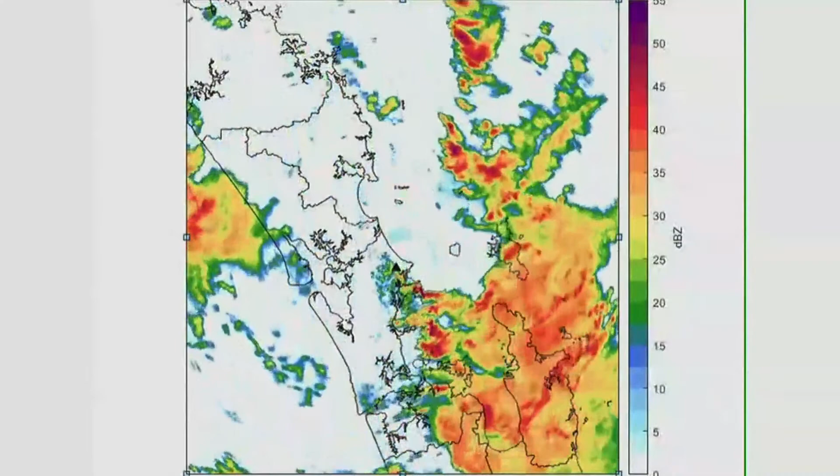We've got here what was hopefully going to be a simulation of the rain radar event. Can someone just click on that? And that's effectively the rain radar. And you see up the top, that's midday at the moment, coming through to 1 o'clock in the afternoon, 2 o'clock, 3 o'clock, 4 o'clock, 5 o'clock, 6 o'clock, 7 o'clock, 8 o'clock, 9 o'clock, through to 10, 11, midnight.

Now, what's exceptional about the event is that the intensity of the rainfall was very widespread across the region. Very unusual to have an event of that duration over that degree of geographic inclusion.

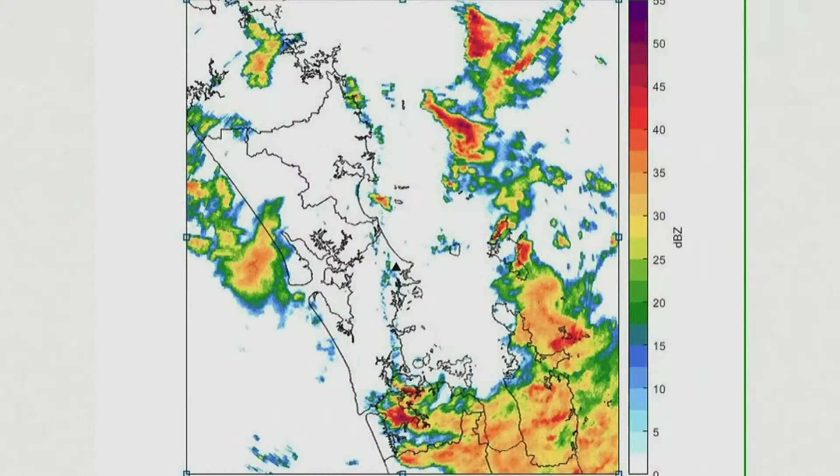What's also interesting about the 27th of January is that the forecasters didn't get this one quite right. So these are two forecasts, one from Windy, one from Metvuw. The blue line is the predicted rainfall and the yellow is the actual. And the two spikes are the 27th of January and the 1st of February.

So unlike Cyclone Gabrielle, where the forecasting was incredibly accurate, in this case the forecasting wasn't accurate, but what I can say is that even on that small blue intensity, the preparedness was for what was considered to be a normal heavy rainfall event, where there's a whole lot of preparedness work that takes place. So the preparedness work still happened for this event, not knowing what exactly we were walking ourselves into.

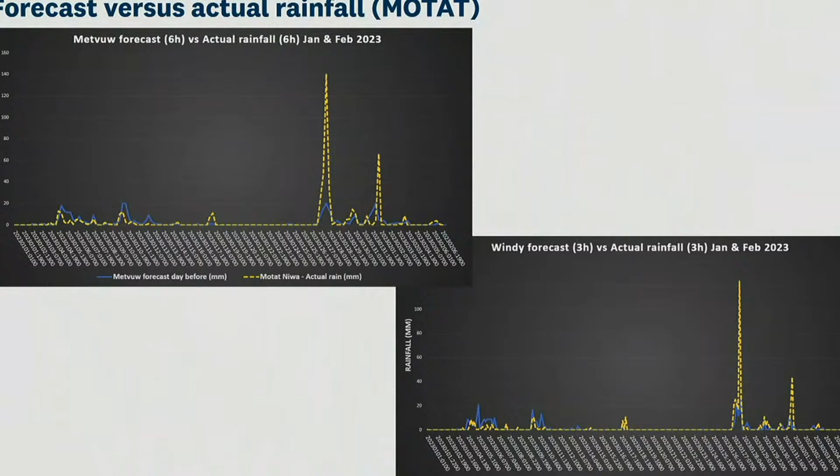So from the rain radar, this is the actual annual rainfall intensity. So the black indicates greater than a 100-year event. And inside that black area, the greater than 100-year event actually is across all durations, whether it's for 10 minutes, 30 minutes, 1 hour, 6 hours, 12 hours, 24 hours. Just about in all cases within that black area, we exceeded that event.

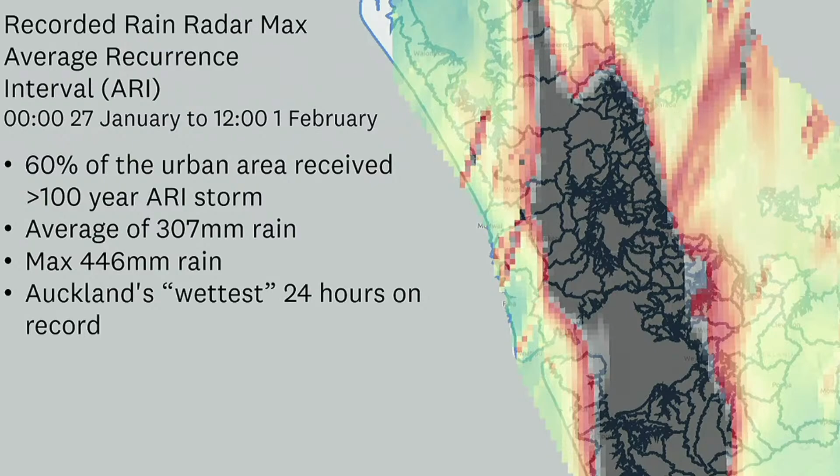In fact, you'll see there that this is actually the wettest 24 hours in the history of Auckland, and the weather records of Auckland go back to the early 1900s. And not only was it greater, it was greater by some 50% than what was previously considered to be a 100-year rainfall event. This is Cyclone Gabrielle.

And for Cyclone Gabrielle, very similar around the 100-year intensity. But of course, what's happening in Cyclone Gabrielle, if you compare to the previous slide, is it's almost the rest of Auckland that missed out on the first event that, ironically, got hit with the second event.

And in terms of Cyclone Gabrielle, we had in Piha in a 24-hour period 360 millimetres of rainfall. Say again? 360 millimetres of rainfall in Piha in a 24-hour period, which absolutely made all of our previous estimates redundant, to be quite honest, because it was so far in excess of any previous design prediction. We had gauges in Muriwai that got that.

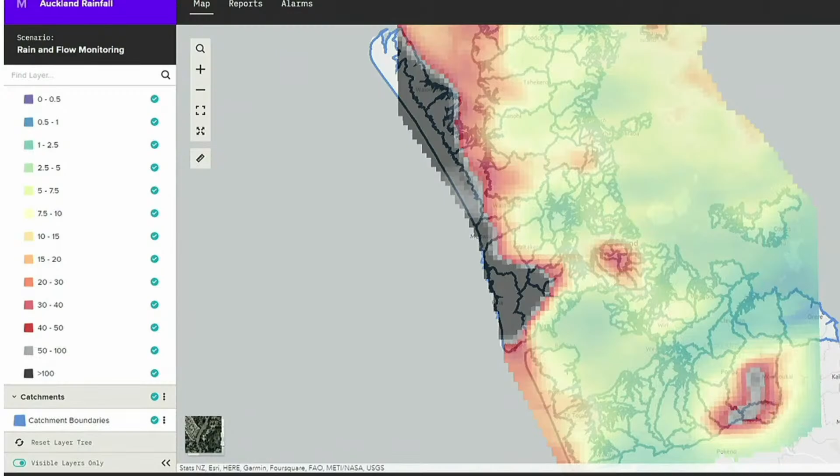And that, of course, is putting huge demands on the staff who are out there responding to these issues. The good news is that we've actually got out there and just about been able to look at every request for service that has come in. Some can be resolved immediately, but a number require a much more detailed engineering investigation. So as of the moment, we have some 970 engineering investigations that are ongoing.

So the sheer scale of the event means that we've had to do a lot of immediate upsizing, if you like, within Healthy Waters from the wider stormwater community to assist in this area. So when we look at our own staff and consultants and contractors who are currently engaged in our response, that number is over 300 full-time equivalents and increasing as I speak.

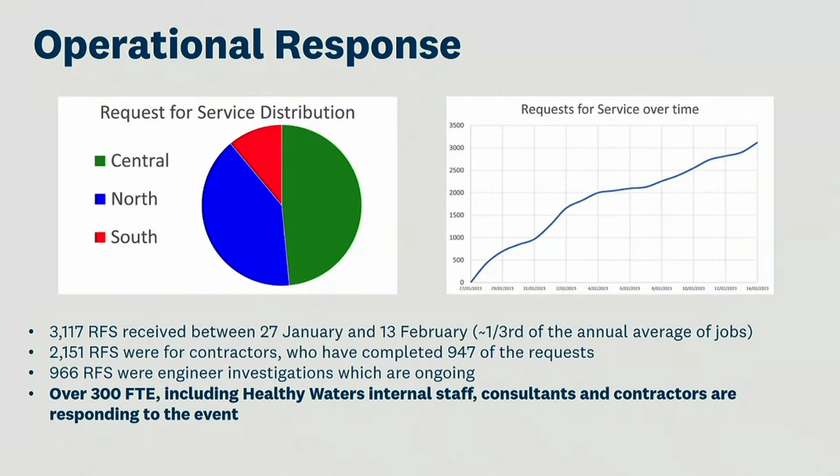Just like to highlight the fact that we do a lot of work on hotspot inspections for every event where there is bad weather forecast. So we have some 230 assets or locations that are subject to that work. And this is an example at Sunnynook, which is one of our recent stormwater projects where we've created a big embayment area to deal with big events. And so this is the cameras that are actually on the Sunnynook grill.

So you can see what it was like when the event started. And on the right-hand side, you can see where it got to at the peak of the event. But you can see how quickly on the day after, on the 28th of January, the water levels have reduced. But you can also see the good work that the grill did, because just look at the sheer volume of material that's deposited against the grill. And of course, that all happened through the event. We've got no way of knowing how that occurred because it's all hidden by the water. But that's the after effect of that grill.

And so I know at the time the community was surprised how large that grill was, but it's certainly done its job. And you can see there that the area's now, pretty much a day or two after the event, back to normal. So that's what can be achieved with good proactive stormwater design.

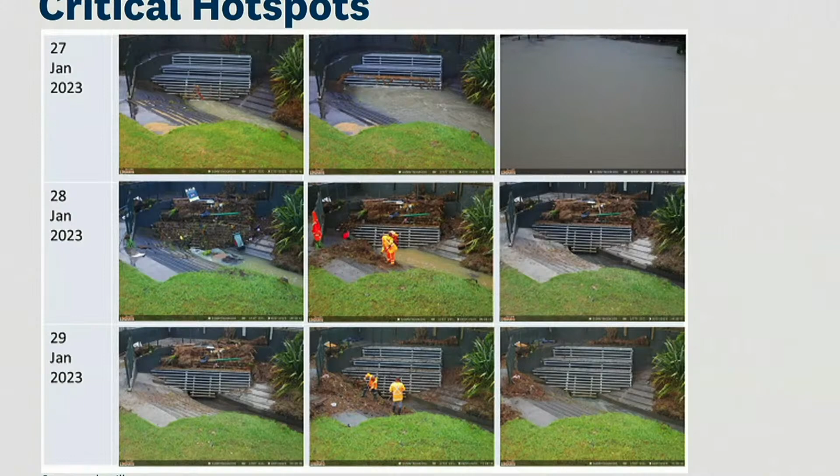And so one of the things that we've been thinking about for both catch pit cleaning and street sweeping is that, because one of the issues we've got at the moment, you go to do sweeping or clearing in a street and cars are in the way. You can't get to the catchpit because there are cars parked over the catchpits. So one of the future initiatives we want to think about is maybe having a bit like a rubbish bin collection slot where every so many months a street is dedicated for a full clearance where the sweeping and the catchpit clearing is done, and the residents would have to find alternative parking arrangements. That's the sort of thing that we probably need to do.

In Japan, they have forklift trucks that come along and lift up all the cars out of the way to do the cesspit clearing, just to show you that it's such a big issue internationally. So moving forward, we really think that the catchpit frequency, annual cleaning, is not good enough, and we need to look at the ability for more funding to increase the frequency of that cleaning.

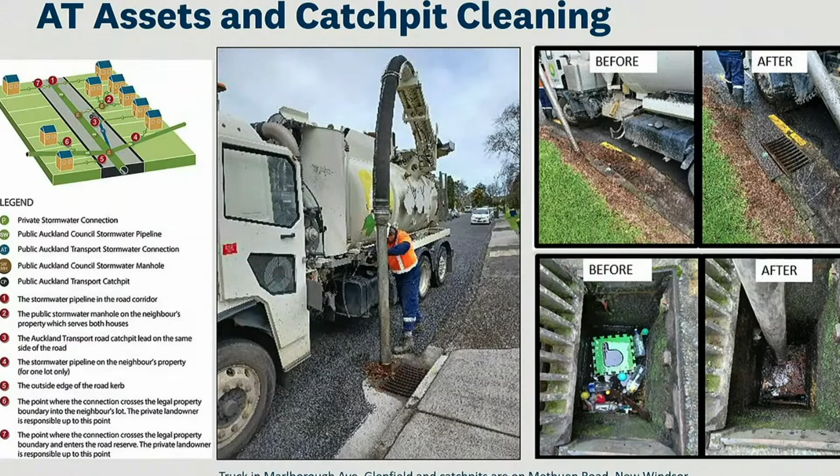Next point I'd like to make is around infrastructure and the fact that when we talk about our network, a massive part of our network is both ground soakage and natural streams. So if you take ground soakage, it's where we've got the fractured basalt, which provides a pathway for the water to get into the natural groundwaters. The problem is that those areas do not work when we get to really high intensity rainfall; those areas get absolutely saturated. So there's nowhere for the water to go.

And the water just can't be pumped down because the hydrostatic pressure from the groundwater will push to the surface faster than the pumps can remove it. So there is no pumping solution under this circumstance. You've just got to let Mother Nature take its path.

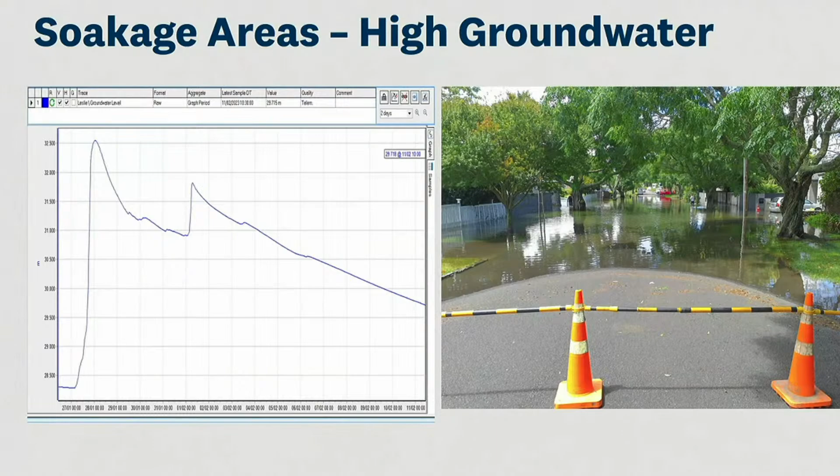I mentioned before the natural streams that we're dealing with, 16,000 kilometres of natural streams. Without those streams fully functioning from a hydraulic point of view, the network can't perform efficiently. And a lot of those streams are in private ownership. And so these are just some of the challenges that we've got around stream blockages and the sheer scale of the length of stream, and relying so heavily on public information around what's happening on those streams, because with the best will in the world, we can't get around 16,000 kilometres of streams.

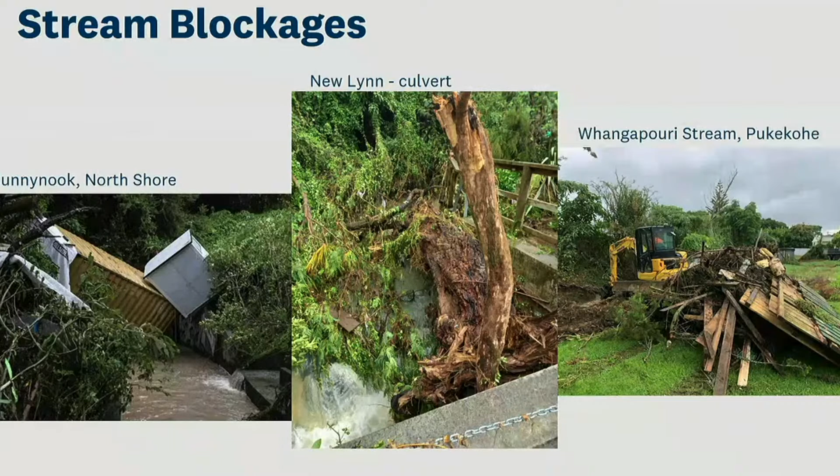So some of the scenes that we've seen, I can assure you, are quite amazing, of portable buildings and the like that have travelled many, many metres to get into our waterways, because the waterways are a natural part of the overland flow path mechanism, which is how the city operates. The water starts at the top of the hill, ends up in the sea, and gravity basically takes over.

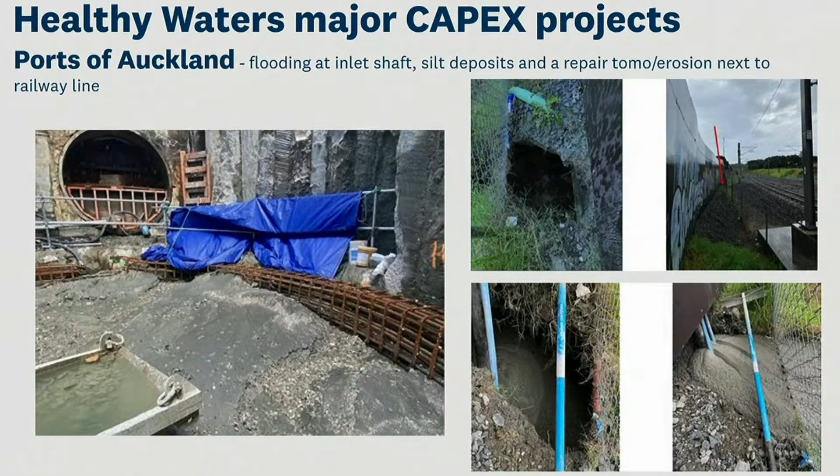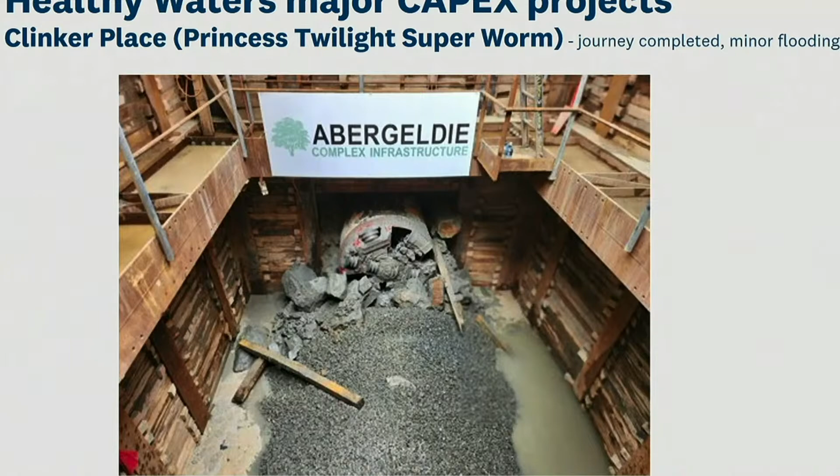And we had a little bit of damage occur as a consequence of our Clinker Place project as well, but relatively minor in the overall scheme of things. So I think it's interesting when you look at infrastructure from a Healthy Waters point of view, the focus is very much around the natural damage as opposed to the damage to the pipe network, which has been relatively minor by comparison with Watercare, which we'll hear about in a minute. We have lost a few lines to slips, etc., but not to the same extent as Watercare.

But what that does mean is you need land in order to accommodate stormwater flows. You do need land, which is okay in greenfield and new brownfield development. But you can imagine existing urban communities. Where do you find the land to provide that level of stormwater protection? It requires some big thinking around the future.

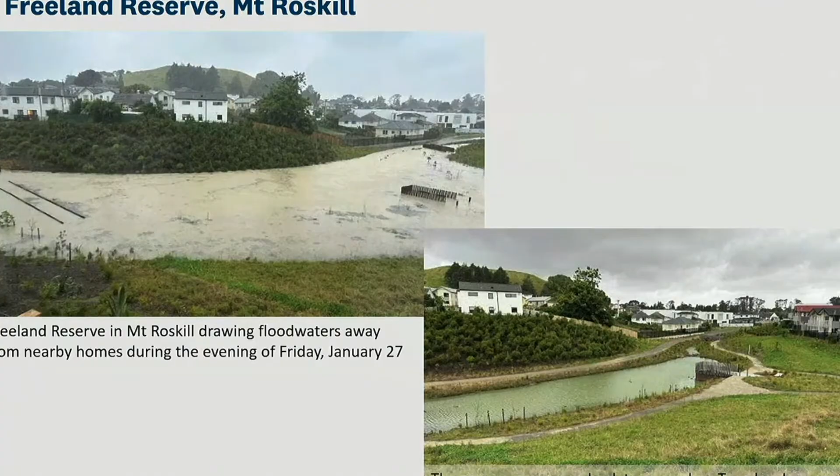So today I'm representing the Watercare team, and firstly we'd just like to thank the Auckland Council team and the wider group, Auckland Transport, Waka Kotahi, for the collaboration and support, Auckland Emergency Management, because there's been an awful lot of difficult emergency works we've had to get out to, and so very much appreciate the collaborative efforts of the wider council group there. Key message there.

This presentation slide deck was prepared before Cyclone Gabrielle hit, so I'll be providing some additional bits of information towards the end about the impacts of Gabrielle on the network. But prior to Gabrielle, we had all of the trunk services up and running. However, there's still a lot of damage in the local networks that we still haven't found and discovered.

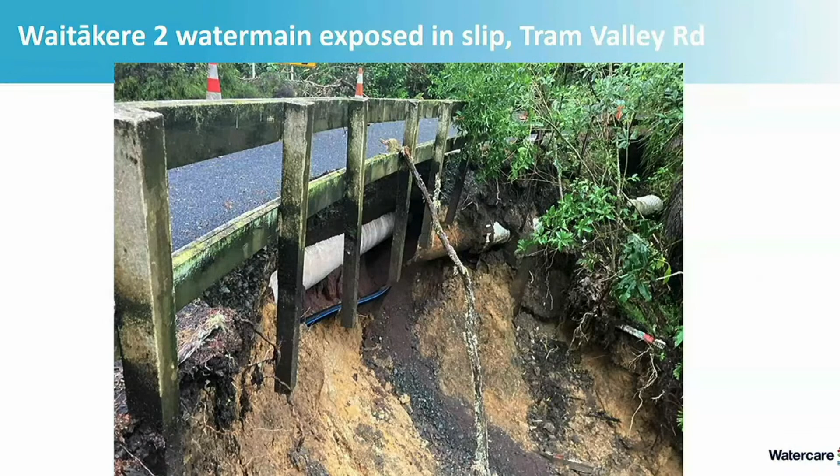So this is Tram Valley Road, and you can see the broken water main there. This is quite a significant piece of damage, and it really goes to show, as Craig alluded to earlier, a lot more damage on Watercare pipelines due to landslips and erosion. This is the Waitakere number 2 water main. The water main's still in service, but as you can see there, it's very vulnerable. All of the erosion has left it exposed, and so the water main's really holding up the road there.

The other impact of the slips is the siltation in the dams and the water supplies. You can see the Lower Nihotupu there, how dark the water is with the sediment. Now, this has created a number of issues, and in particular, following Gabrielle, it's knocked out some of the water treatment plants. And so I'll talk to those in a bit, but the sedimentation in the dams is a major problem.

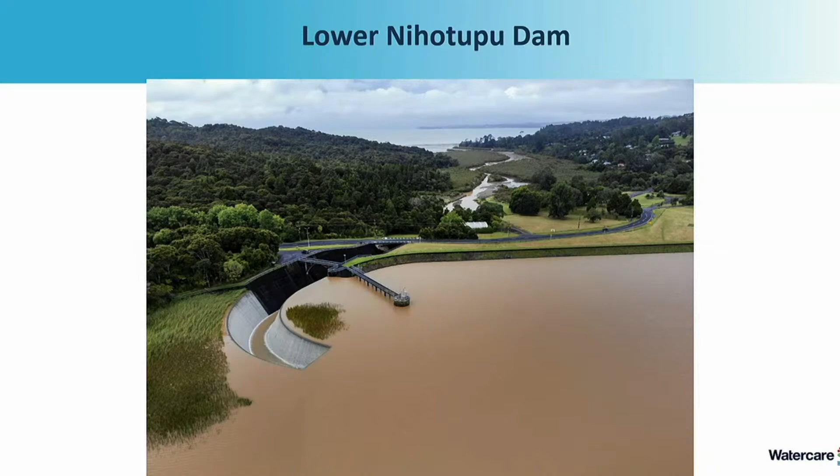So that just sort of talks to the phasing of our incident response, and we've got services restored to a large extent, but the key message today is the system is still very fragile, and I'll talk to this now in the following slides. So firstly, the Huia water treatment system on the raw water or the untreated supply, that sediment has reduced the capacity of the Huia water treatment plant. We've also lost some key pipelines that supply the treatment plant. So effectively the Huia water treatment plant is down to about 50% of its normal capacity.

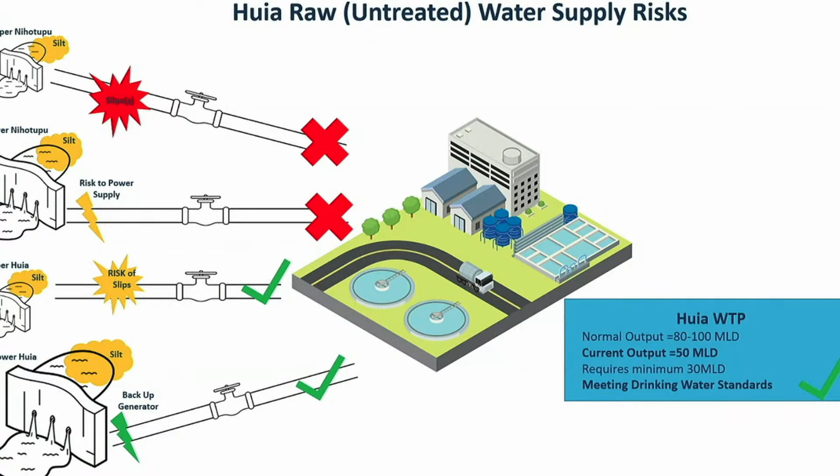What does this mean? I'll probably add Cyclone Gabrielle heavily impacted the Waitakere water treatment plant. That is currently out of service because the sediment is so high in the Waitakere treatment plant. So we are now providing water to the wider metropolitan area mostly from the southern catchments by the Ardmore treatment plant, and the New Lynn pumping station is now a really critical pinch point, and that is backfeeding the water up through the west. Normally the water from the Waitakeres is going into the North Shore and providing the west. Right now we're operating the network so it's feeding up from the south through that critical New Lynn pumping station.

One thing to note is the turbidity in the Hunuas. Cyclone Gabrielle actually was quite heavy rainfall in the Hunuas, but there was a lot of remediation done following Tempest and improvements to the Ardmore treatment plant, and so things are not looking too bad at Ardmore thanks to the restorations that we've done post the Tasman Tempest.

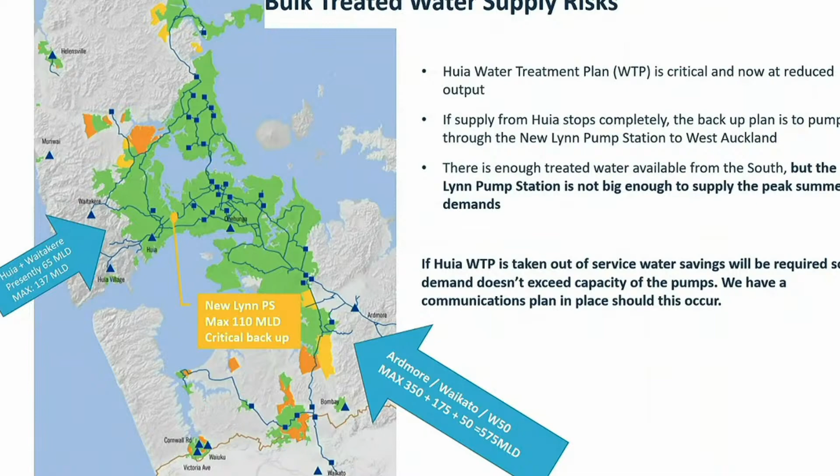In the local supply, so I've just talked about the bulk transmission supply in the wider network, but in the local area around Titirangi, South Titirangi, that slip on Scenic Drive, that water main's out from the Nihotupu Reservoir that supplies water to the South Titirangi and the Konini water supply zones. So now we've reconfigured the network so it's been back supplied from the Titirangi zone, and now a new alternative supply coming in from the Pleasant Road pump station is back feeding those zones. So that was just completed yesterday. So the water supply is back up and fully functioning in that area. But what you don't see there is that now the Waitakere water treatment plant is currently out of service.

So just a quick update on some of the impacts of Cyclone Gabrielle. Muriwai water treatment plant has been red stickered. The slip has severely impacted that, and so the communities there are being supplied by water tanker, which they'll have to go down to and get containers to fill up at Muriwai. That's a major, and it's unclear how long it will take to re-establish alternative water supply to the Muriwai community.

I've mentioned the turbidity issues in the Waitakere water treatment plant, so that's currently offline. In Helensville, also high turbidity levels. At the moment, we are filling up the transmission reservoir with water tankers, so there's a fleet of water tankers going round the clock, topping up the reservoir in Helensville.

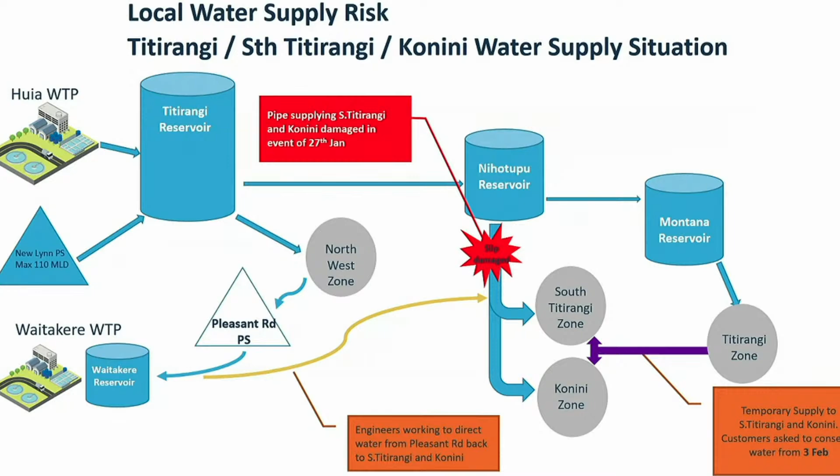So we encourage the community to notify Watercare if they see that damage through the Watercare websites and the chatbot in the call centre. That's the best way for us to track and record and monitor the progress of those repairs and damages. But there will still be quite some time before we discover all of the issues in the local network. The good news is the trunk infrastructure is up in place. And this is just a little bit of an outline of the recovery process that we're working to at the moment. So if there's any pātai for Craig and I, happy to receive it now.

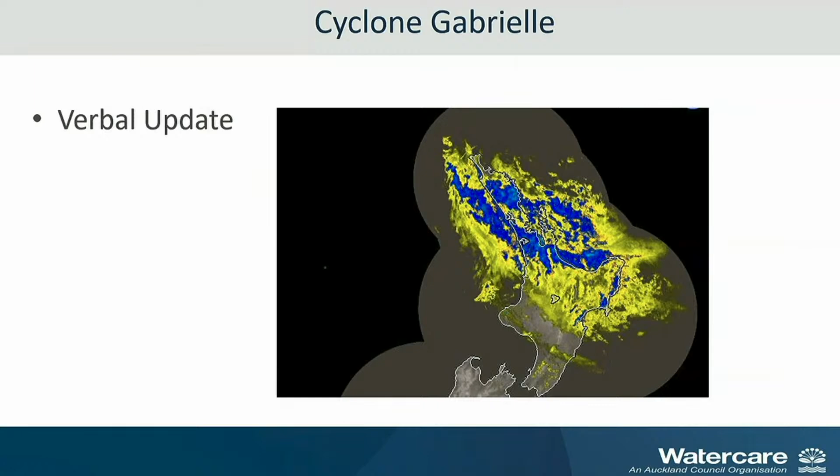Okay, so thank you, Andrew. They were two outstanding presentations in terms of the visuals that are used there, and the challenges that we now face. So thanks very much for that, and also really good to see the cooperation between the Council, Healthy Waters and Watercare. Andrew, of course, seconded to Watercare, so that's really good to see that cooperation on the ground, particularly in emergency events like that.

Okay, ladies and gentlemen, the plan is to have lunch very shortly, as soon as possible. We've got a lot of information there. We will be revisiting large chunks of this for the remainder of the year now in more detail. So if we could just keep the questions, please, to just matters of clarification, because we've all probably got things we'd like to examine in terms of what we've experienced ourselves, but they will be getting picked up. Okay, so we have Councillor Newman and Councillor Turner.

Councillor Newman. I've got a pile of questions which I will not give to you today, but I do have one. Your ability at this stage to be able to remove trees in the road corridor that are compromising the resilience of your drains as you have identified through clearance to date. How are you going with that? Yeah, so we're continuing to do clearance work within the natural waterways on a priority basis. We've only got obviously so much resource we can throw at it, but we're doing all we can, and that's on an ongoing basis.

Councillor Newman. I might just follow up in particular around the table drains on the Mill Road corridor. AT have graciously allowed us to use emergency provisions for traffic management to get up and clear out those critical drains as a matter of urgency. Are you able to provide some advice as to the rule changes you require from Auckland Council in order to be able to effectively remove trees where the roots are compromising your drain network?